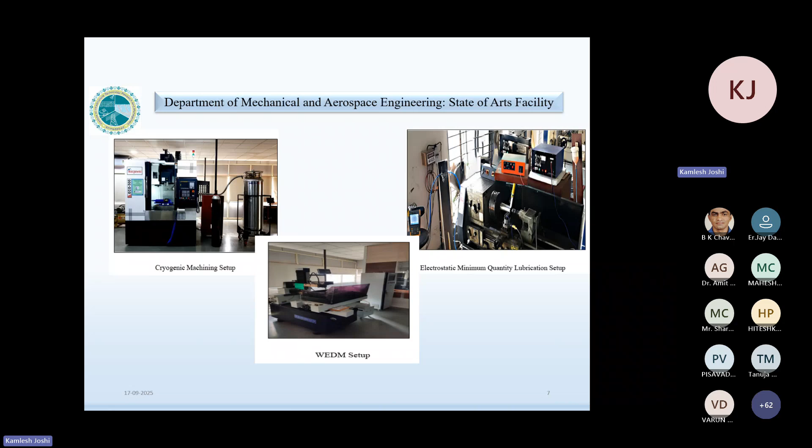Apart from these basic labs, we have some state-of-the-art facilities including the cryogenic machining setup, WEDM setup, electrostatic minimum quantity lubrication setup, air conditioning simulator, wind tunnel, rotational molding setup for making plastic products, photoelastic experiment using polariscope, and a high speed computational facility for simulation with software packages like ANSYS, MATLAB, and Abaqus.

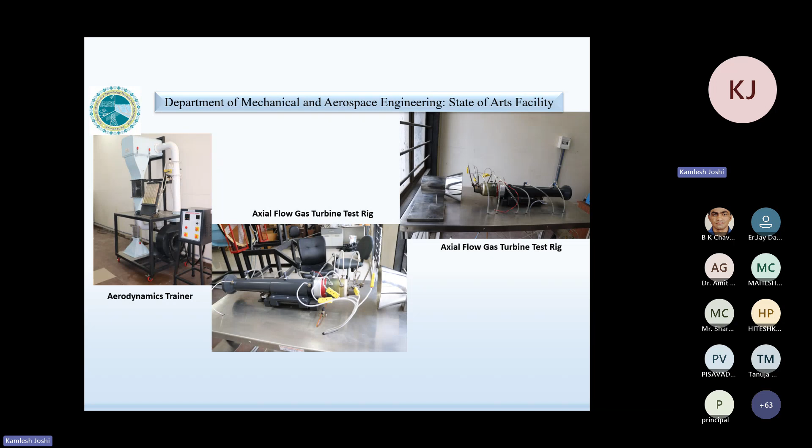In the field of aerospace, we have an aerodynamics trainer and an axial flow gas turbine test rig. All these facilities are open to all researchers - anyone can come and join and work with IITRAM at our institute.

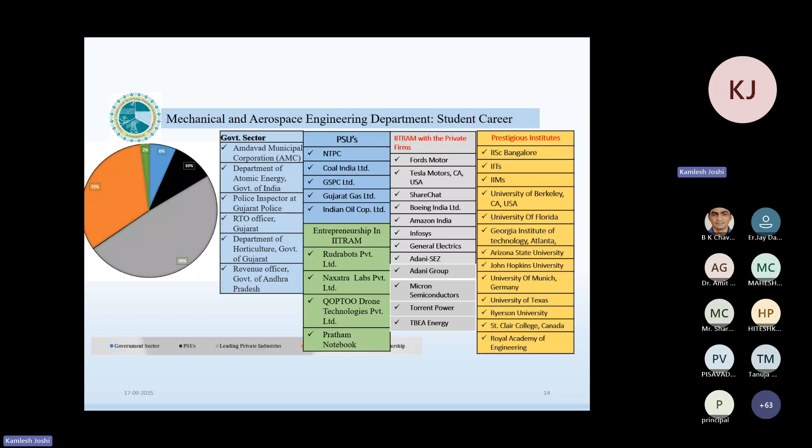These are some of the sectors where our students get placed - government sector, PSUs - and these are some of the universities where our students go for higher studies. So this was a brief introduction to our department.

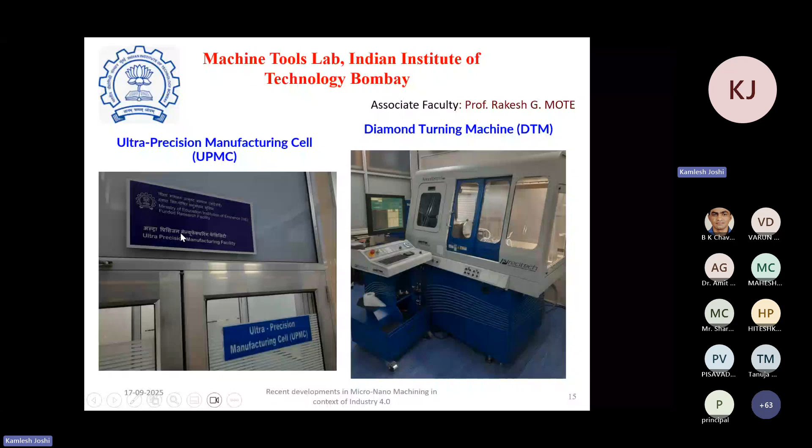Now the work which I will be presenting today is done in collaboration with IIT Bombay. Here it shows the facility of the diamond turning machine at IIT Bombay, and the associated professor is Professor Rakesh Mote. The facility developed is an ultra precision manufacturing facility, funded by the Ministry of Education under the Institute of Eminence program.

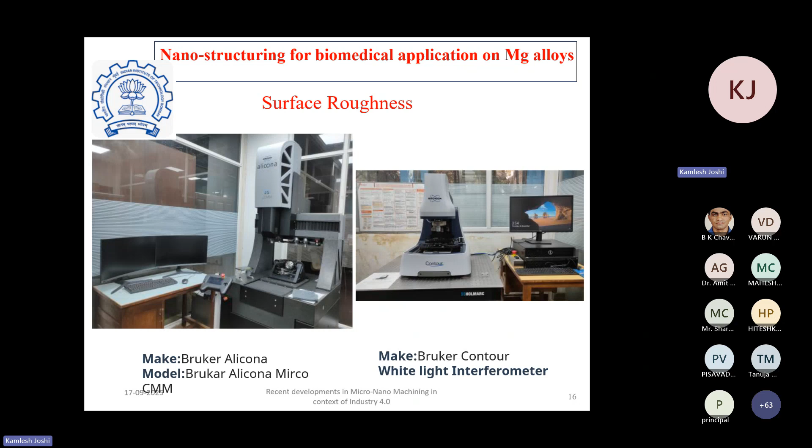Along with this, some of the other facilities we are using include the tool maker's microscope, white light interferometer, Alicona microscope, and an optical tensiometer to measure the contact angle of a drop.

Let's say if we have a surface and we put a drop over it, then the tensiometer can measure the angle of contact made by the solid surface and the liquid surface. If the angle is acute, less than 90°, we can say that the surface is hydrophilic, meaning it is a wetting type of surface, and the liquid will wet the surface.

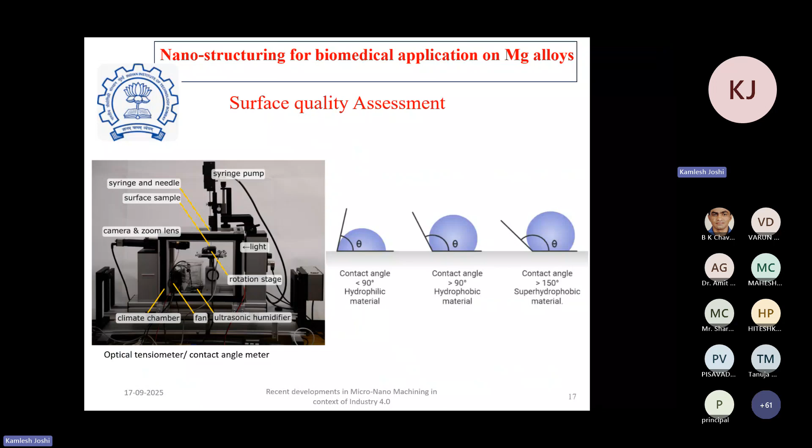If the angle goes beyond 90°, the surface is called a hydrophobic surface, and it becomes slightly non-wetting. If we are further able to increase this angle by more than 150°, then the surfaces are known as super hydrophobic surfaces, and the materials are super hydrophobic materials. So this is what the facilities we have at IIT Bombay.

Now, as per the theme of the program, I first want to give a brief about the different types of manufacturing in terms of domain. We have regular manufacturing here, which is conventional using lathe machine and milling machine - that is known as macro manufacturing. Here the part size or feature size varies from 1 mm to 1 meter.

Then if we are able to reduce the feature size to hundreds of nanometers up to some micrometers range, the manufacturing is known as micro manufacturing. We have a list of machining and manufacturing processes which are classified into macro manufacturing and micro manufacturing.

The processes which link these two, macro manufacturing and micro manufacturing, are termed as meso manufacturing. And the processes which go beyond micro manufacturing, whose feature size goes beyond tens of nanometers up to the angstrom level, come under nano manufacturing processes.

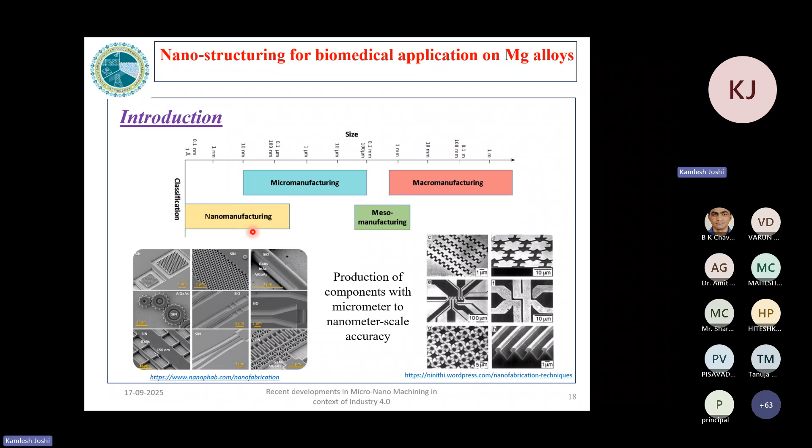Classification wise, the processes which come under conventional machining and have large components are macro machining processes. If we reduce the size to millimeters in terms of depth of cut, miniaturized products and mid-sized structures result, and the process is termed meso machining. Further, if the machining depth of cuts are in the micrometer range - for example micro turning, micro milling, micro electro mechanical systems - then the processes are micro machining processes.

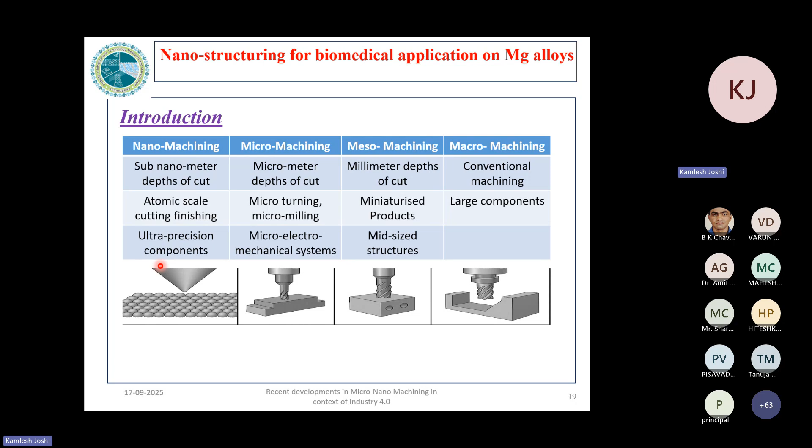And if we further reduce the processes to sub-nanometer depths of cut, machining at the atomic scale - meaning we are machining grain to grain, with the cutting radius of the tool in the range of grain size - then it is a nano machining process, and we can make ultra precision components from nano machining processes.

Processes can be classified in two ways. One is microsystem technologies, which are generally employed to produce micro electromechanical systems, and the other is microengineering technologies, which are processes related to mechanical machining.

In MST processes, where we produce micro electromechanical systems, we have processes like photolithography, electroplating, micro electroforming, and chemical etching, where we don't use either conventional machining forces or unconventional modes of material removal. These processes are classified as microsystem technologies.

When processes use shear deformation to get the shape, we call those processes microengineering technologies. The classification includes micro turning, cutting, micro milling, grinding, and some non-conventional machining processes like laser machining, micro EDM or EDM, and focused ion beam machining. These processes come under mechanical machining processes.

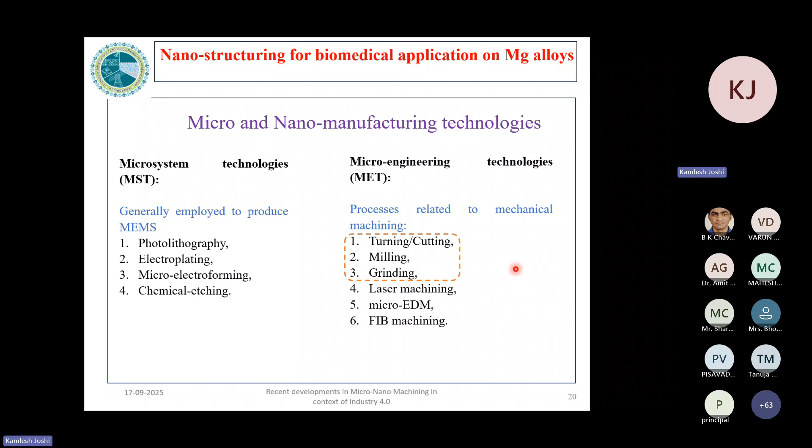We'll see in brief one by one what are the capabilities of these processes and what parts can be made. First, the schematic shows the micro cutting process.

Here we can see a tool whose rake angle is negative, and the chip formation is happening there, and the cutting is happening in this direction. So you can see the tool can be seen as a sharp tool. This is a macro machining process.

But when we cut grain to grain in micro machining or nano machining process, we cannot have such a tool. If you magnify the tool, you can see that it is not sharp as seen in the figure. The tool will have some edge radius, maybe in the range of 0.2 to 0.5 mm. Due to this edge radius, different types of mechanisms come into play - either shear deformation, or extrusion type process, or simply plowing. These phenomena come into picture when we do the micro cutting process.

The depth of cut in conventional macro machining is significantly larger than the radius of the cutting tool. This depth is sufficiently large in conventional macro cutting, and the macro chip formation models are created with the assumption that the cutting tool can completely remove the surface material.

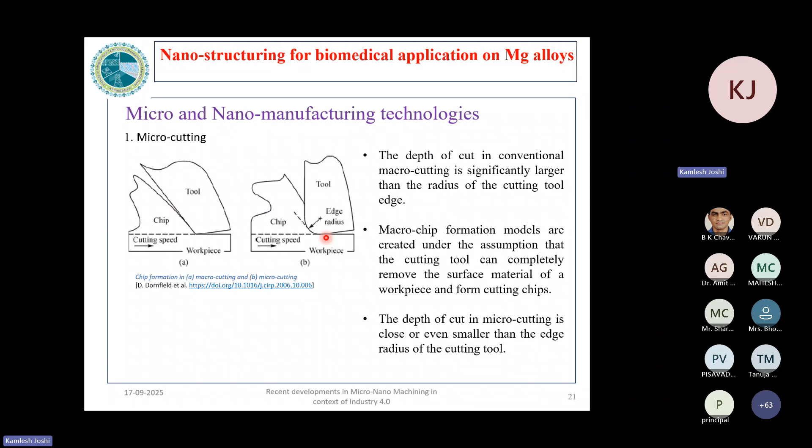But in micro cutting, the depth of cut is close to the radius of the cutting tool. So if we want the depth of cut very small, we can keep it in the range of the edge radius of the tool.

Here some of the features are there which we can see. In micro cutting, we can produce rotational convex shapes with high aspect ratio. This is a needle, and you can see the diameter of the needle is in the range of 5 micrometers, and the surface roughness achieved is in the range of 0.05 to 0.3 micrometers.

Similarly, a plastic molded part is there, where we can see a slot, also in this range, and the surface finish is less than 10 micrometer... nanometer. This is from micro milling.

The references are given. Holes drilling can be done using the micro drilling process. The size of the hole is again in the range of 5 micrometers, and we can make some convex and concave shapes of hard brittle material.

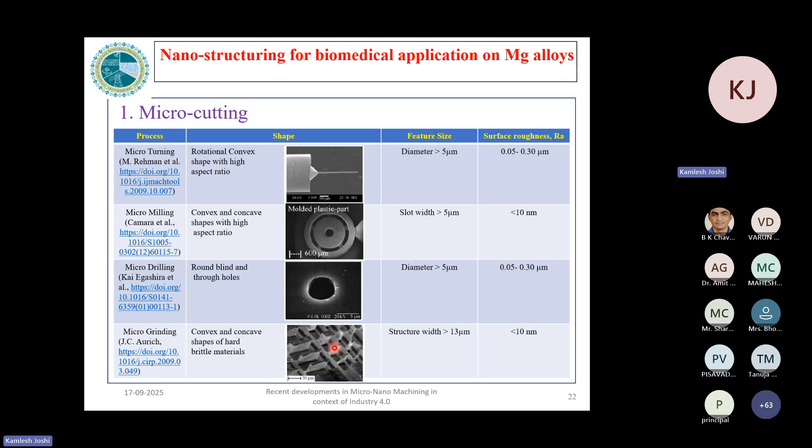You can see the structure width is in the range of 13 micrometers, and the surface roughness is in the 10 nanometer range.

Micro EDM is again one of the advancements in the conventional EDM process, where we can get the wall thickness of the material in the micrometers and nanometers range.

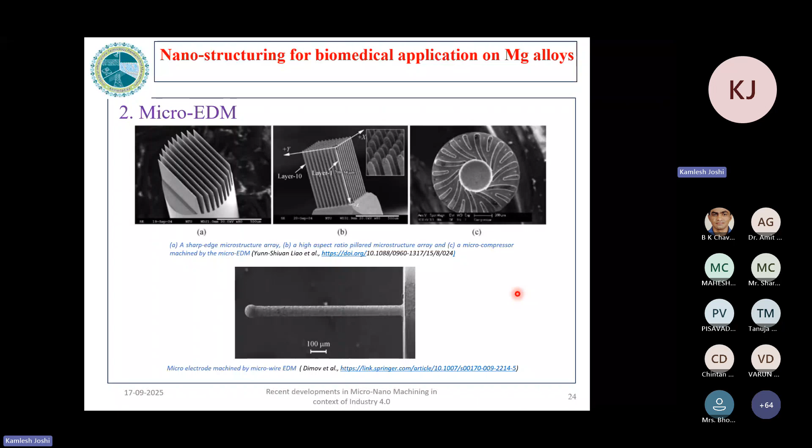You can see some of the examples. A sharp edge microstructure array is there. A high aspect ratio pillars array is shown here, and a micro compressor machined by EDM process is shown. Similarly, a micro electrode machined by micro wire EDM is shown here. So these are some of the difficult to achieve shapes which we can achieve from the machining process.

Another process is laser micro machining. The laser is having a vast capability on its own, and it can produce various difficult to achieve shapes, like these through holes arrays, and you can see we can achieve the arrays required through laser machining. This is the honeycomb type of microstructure which we can make, and this is a micro spinneret in the size of hundreds of micrometers, and these are some of the cone like protrusions fabricated by laser micro machining.

Laser micro machining can be done in two ways. One is the percussion type of laser drilling, where the laser beam is focused on one area, and then it keeps on removing the material throughout the depth. You can see high depth can be achieved. The problem here is that we get a diameter which is tapered from top to bottom.

Another way is the trepanning type of process, where we rotate the beam from corners to edge and remove the material. The hole diameters achieved are relatively more compared with the percussion method, but here the tapering is not an issue. So if we want to have a uniform type of hole with uniform diameter, we can use this type of process.

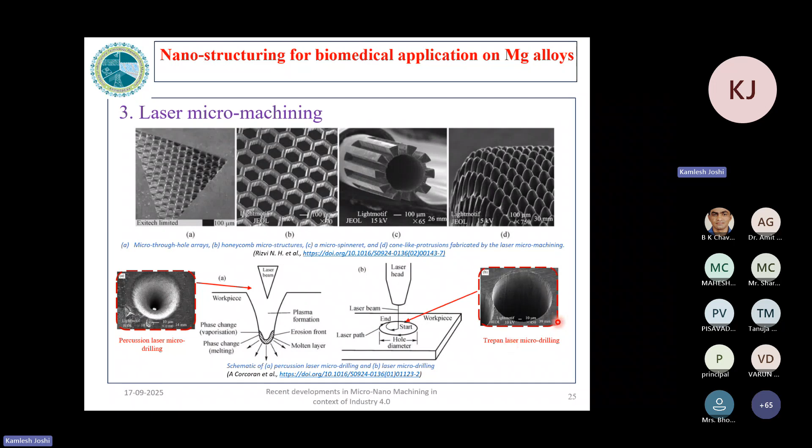And the last process which I want to discuss is the focused ion beam type of process. Here we have ions of high energy focused on the substrate, and these higher energy ions bombard the substrate, which causes localized heating. It removes the material in sputtering form and creates the hole by removing the material. You can see some of the specimen here.

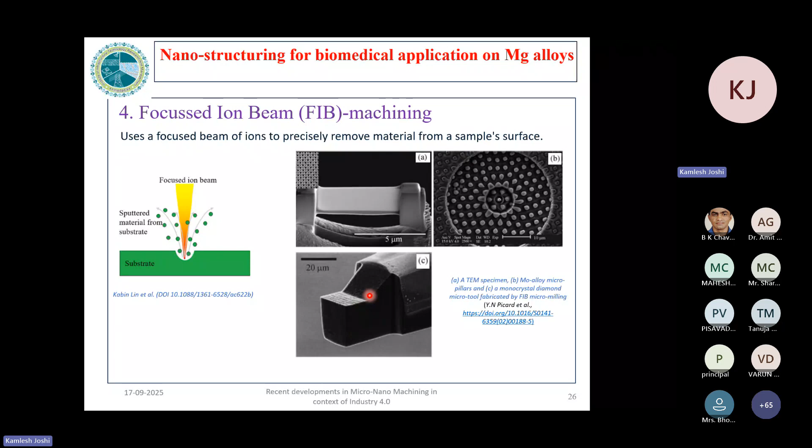One of the uses of this FIB process is to prepare transmission electron microscopy samples. In this example, you can see molybdenum alloy micropillars are made, and a monocrystal diamond micro tool is fabricated using focused ion beam micro milling. So these tools can then be used in the diamond turning process to create the required features.

Now coming to the theme of the topic, that we want to produce the micro features on the magnesium alloys. So before going to the magnesium alloys, we will see what are the orthopedic and dental implants.

As we already know, orthopedic implants are the metallic or alloy parts which are inserted into the body of the patient to get the desired strength of a particular part. The common materials used are stainless steel and titanium.

So what happens is in some cases, after the part is put in and healing occurs, tissue growth happens in the part, and we have to remove the implanted part using a secondary surgery, such as if we are putting some screws, plates or rods in the bones, and after some time if our bones get healed, we have to remove those parts using a secondary surgery.

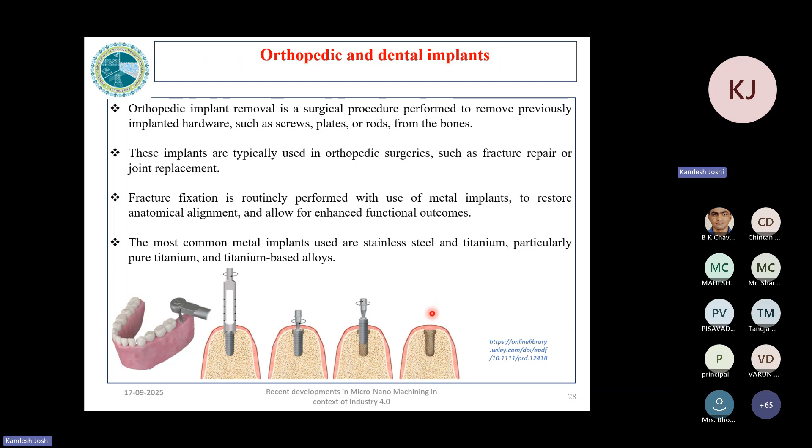You can see here an orthodontic implant example is shown. First drilling is done, and then we are putting some screws inside the gums, and once the screw has been inserted, it'll develop the tissues and strength around the system, and then the screw will be removed, and the required tooth will be inserted in this place. So this is one of the examples.

People have used or tried magnesium based biodegradable temporary implants in the body. So why are we choosing magnesium over already successful materials like titanium and stainless steel? Because they have emerged as a promising alternative to traditional metallic implants due to their biocompatibility, biodegradability, and acceptable mechanical properties.

So they have this property that once they are inserted inside a patient's body and the body heals, we are not required to perform a secondary surgery. They get absorbed in the body, and hence they reduce the need of removal due to secondary surgery.

And as we are not doing the secondary surgery, the potential for long-term complications has been avoided. So these types of implants are used in orthopedics, dentistry, cardiology, and some other medical fields. Some of the examples are shown here. These are the orthopedic devices which are made from magnesium alloys. This is one of the tightening screws, as we have seen in the previous slide.

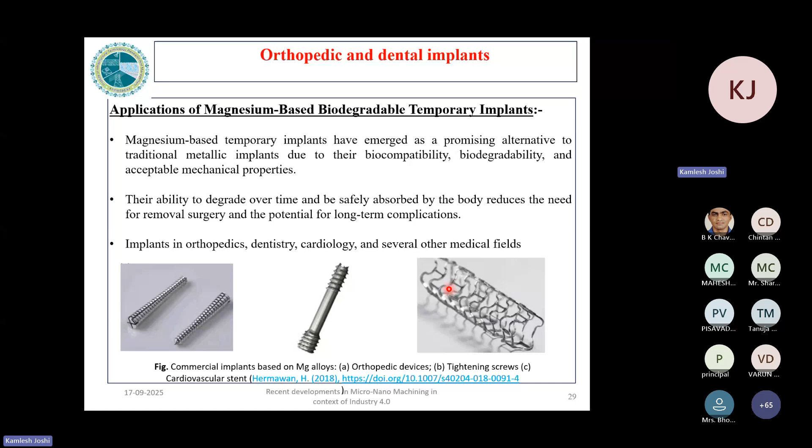And a cardiovascular stent is shown here in this picture, which is used to expand the blood arteries. If there are some blockages there, the doctor will insert this type of stent in the body, and then they will expand the artery and help the flow of blood inside the body. Similarly, you can see there are various types of stents made from magnesium alloys and various other orthopedic implants made using magnesium alloys.

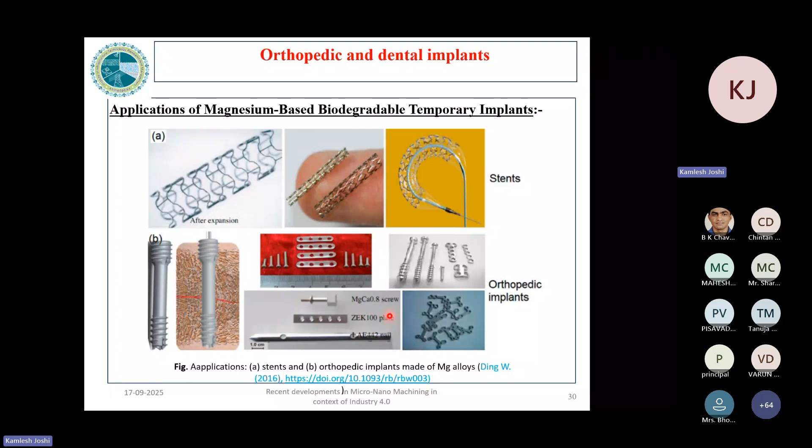So magnesium alloys are a very good choice for implants. So what are the main properties due to which they have become a competitive material for titanium and stainless steel? So first, their mechanical properties are similar to the bone material. And these properties can be tailored using alloying elements like aluminum and zinc. These alloying elements will enhance the strength and reduce corrosion-forming impurities like iron and nickel.

The second advantage of magnesium and its alloys is that they have very good biocompatibility with the body. So magnesium has similar mechanical properties as human bones. However, gradually they are absorbed by the body, and magnesium is one of the required ions or minerals in the body. So if it gets dissolved in the body or mixed with the bloodstream, it does not harm the body. Therefore, if it gets absorbed in the body, it eliminates the need for secondary surgery, which is generally used with titanium implants.

Third, it has very good biodegradation. Biodegradation refers to the process by which a material breaks down over time in the physiological environment. A physiological environment, like the blood in our body, and the material gets metabolized or excreted in the body.

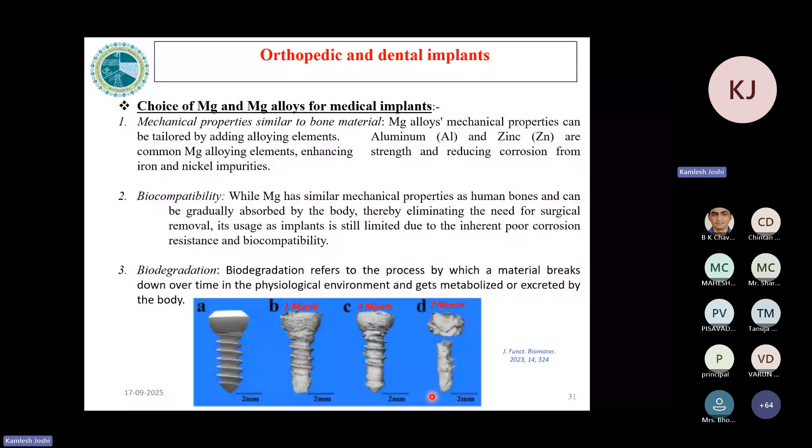Okay, so here is an example where a screw can be seen. If we put this screw in a physiological environment, after 1 month it will show degradation, which can be seen in this picture. Further, after 4 months, the screw got degraded in this manner, and after 7 months, the screw got degraded completely at this point.

Fourth and foremost, the most important thing is osseointegration. Osseointegration is the bioactivity, meaning it helps grow tissue and promotes the growth of tissue over the implant. It creates an apatite layer composed of inorganic compounds like calcium and phosphates. So let's say we have a magnesium material in contact with our bloodstream or other physiological environment. Due to the reaction with this media, it will generate magnesium ions.

When these magnesium ions are generated, they interact with the body media and make the magnesium hydroxide component. Further, this magnesium hydroxide combines with the calcium ions and phosphate ions in the blood and makes a layer known as the apatite layer. This apatite layer, which can be seen here in brown color, covers our implant, and tissue growth can happen over it.

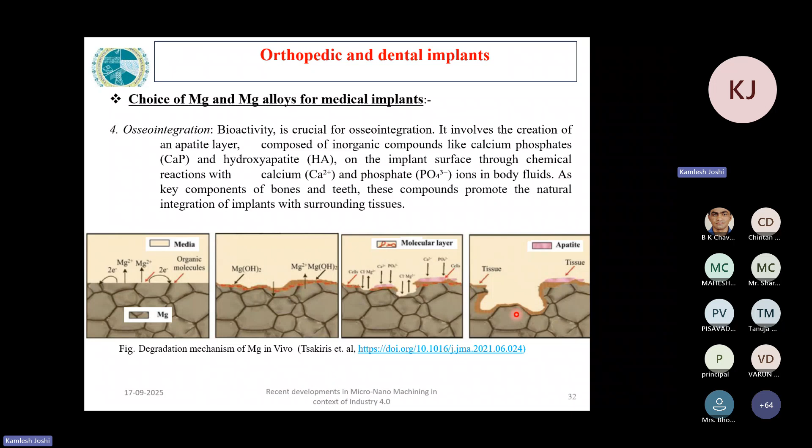So this is a type of passive layer which stops further degradation of the magnesium alloy implant, and it helps in the production of tissue over the material.

Okay, so here is a summary of why we have chosen magnesium and magnesium alloys for medical implants. First, they have natural biodegradation capacity due to their susceptibility to corrosion in aqueous solutions, especially those containing chloride ions, as compared to iron and its alloys. Magnesium has excellent biocompatibility, and its ions released in the bloodstream are used in natural metabolism and do not have any toxic or side effects on the body.

Its mechanical properties, like modulus of elasticity, match the natural bone modulus of elasticity, as compared with other materials like stainless steel, cobalt-based and titanium-based materials. For these three materials, you can see the modulus of elasticity is very high. However, magnesium has a comparable range with the bone material.

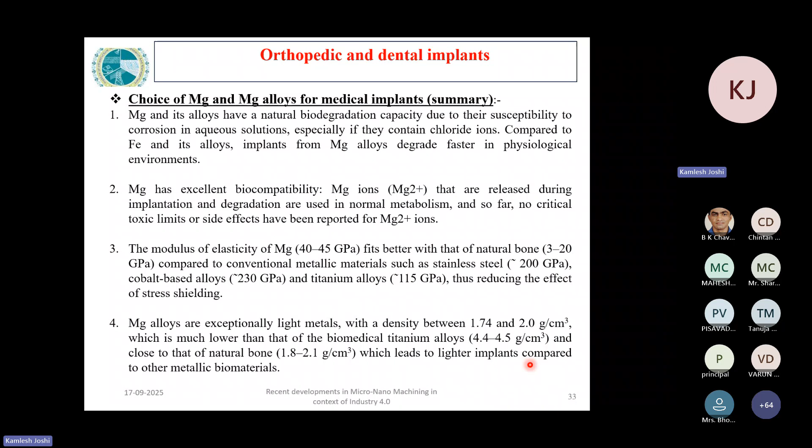They are also exceptionally light materials. The density lies around 1 to 2 grams per cubic centimeter, which is much lower than titanium alloys, around 3 to 4 times that of magnesium alloy. And this density is closer to natural bone, which leads to lighter implants compared to other metallic biomaterials.

So here we have seen the three steps of biodegradation. First, surface oxidation happens. Magnesium-based implants, when exposed to the biological environment, develop a thin oxide layer, as seen in the previous slide.

And these oxide layers tend to serve as a protective layer and prevent further corrosion and degradation of the magnesium implant. In the second stage, the corrosion starts. The magnesium implants start to corrode actively in the biological medium by the electrochemical reaction. So the anodic and cathodic reactions are shown here.

Magnesium first disintegrates in the form of magnesium ions and electrons. When these magnesium ions and electrons interact with water molecules, at the cathode, hydrogen gas evolution takes place, and the product is magnesium hydroxide, which is a biocompatible type of material.

In the third stage, dissolution takes place, where the magnesium implant is gradually dissolved in the body fluids, and the released magnesium ions are transported away in the body fluids, and then they are excreted through our urinary system.

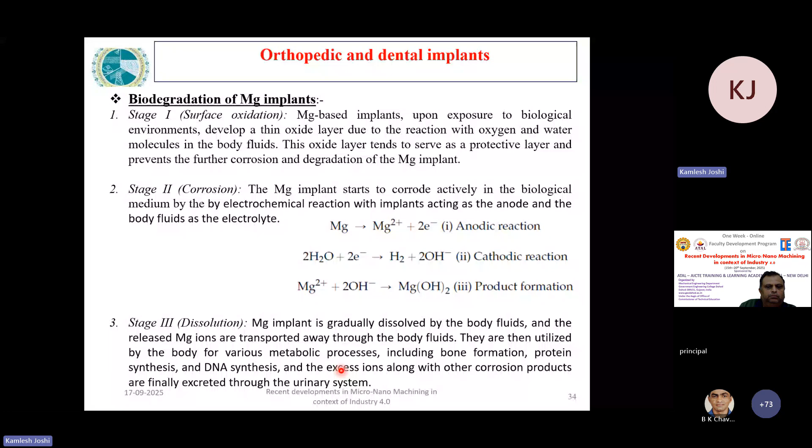So apart from these advantages, there are some issues in the use of magnesium as a bioabsorbable material. First, its rapid corrosion and degradation is one of the issues, which causes the formation of magnesium oxides quickly in the body. This rapid degradation can lead to premature loss of mechanical integrity before the tissue has been fully healed.

Another problem is the hydrogen gas evolution during corrosion, which causes gas pockets, tissue necrosis, and delayed healing. So this hydrogen gas evolution is another problem, and it has low strength and fatigue resistance, which can be problematic for load bearing applications. If the application is of static type of loading, then there is no problem. But if the application is of dynamic nature, then due to its lower fatigue resistance, it may cause some problems.

So these problems can be overcome in various ways. One of the ways is to add alloying elements to the magnesium. So the addition of alloying elements such as aluminum, manganese, zinc, zirconium, calcium, and other rare earth elements enhances the corrosion resistance of magnesium based implants and effectively controls the biodegradation.

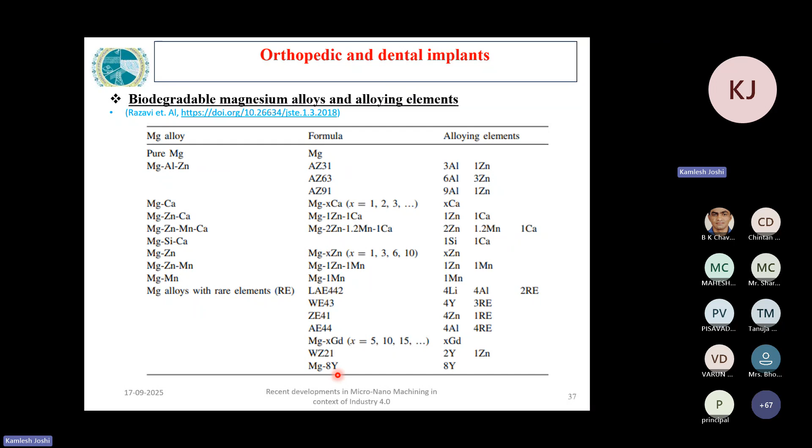Here a list has been shown which shows various types of magnesium alloys which can be used as bio implant material. First is pure magnesium. However, the dissolution rate in pure magnesium is very high. Other ones are AZ31B, AZ63B, AZ91B, and they vary in the aluminum composition inside them. Apart from this, there are several other materials which are yet to be explored for biomedical application.

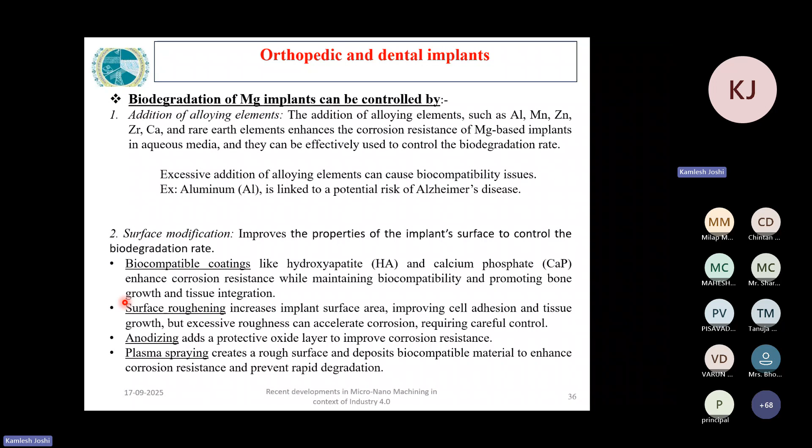Now in this work, what we are focusing on is to change the surface of the material to improve the roughness parameters of the material and improve the hydrophobicity of the material. In order to do so, we can use several methods. Laser machining is one of the ways which people have already tried. We have this facility of the diamond turning process, which has the ability to produce micro features or nano level features on the surface, and those nano level features can affect the corrosion behavior of the material.

So first we'll see what this diamond turning process is. So the diamond turning process is similar to our conventional lathe machining process. The only thing is that the tool size is very controlled, and it is an ultra precision machining process which is used for achieving a surface roughness in the range of nanometers on various difficult to machine materials without affecting the accuracy of the components. The famous material used in the diamond turning process is aluminum. Brittle materials like silicon carbide are also usually investigated with this diamond turning process.

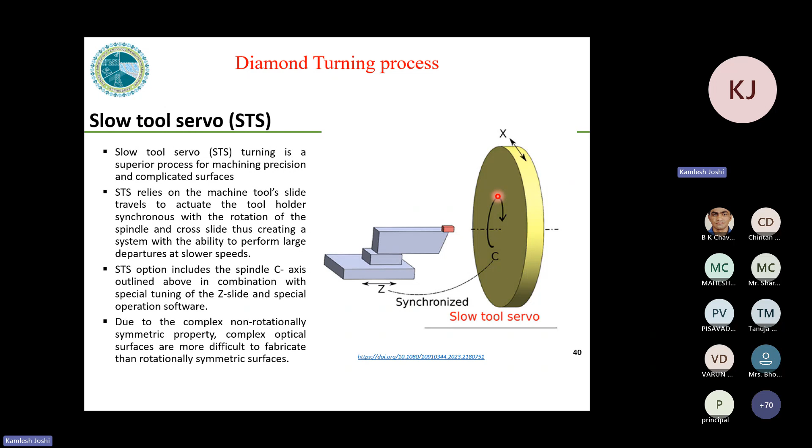First, what is a slow tool servo process? In this, the tool post is vibrated parallel to the z-axis. So slow tool servo turning is a process for machining precision and complicated surfaces. It relies on the tool slide and includes the spindle c-axis motion, and the motion of this vibration is synchronized with this c motion. We can have a video to see the slow tool servo process.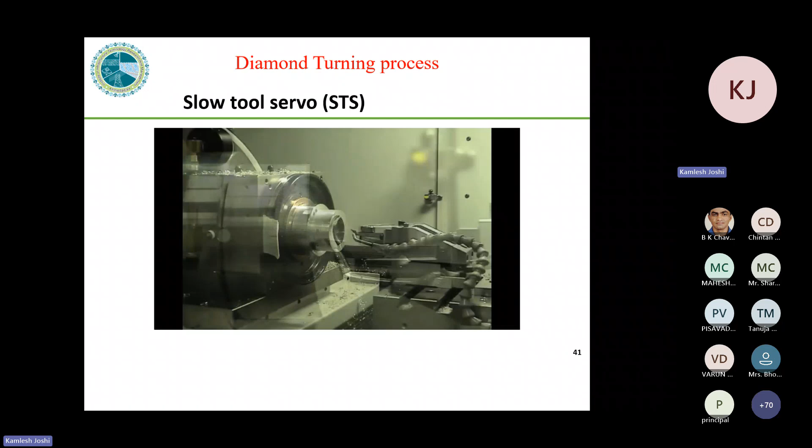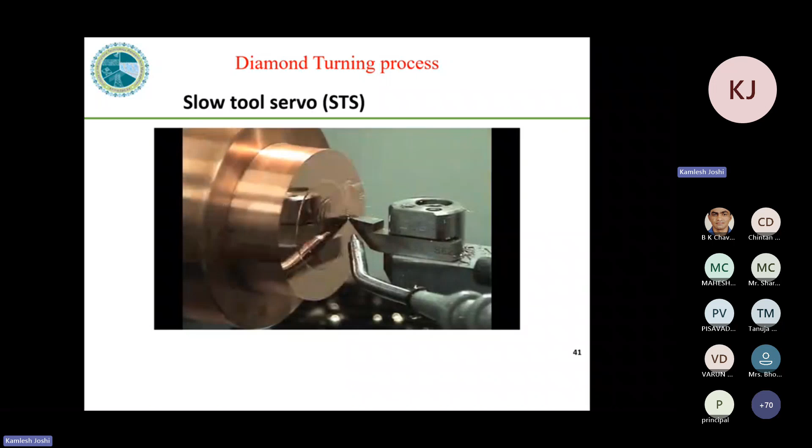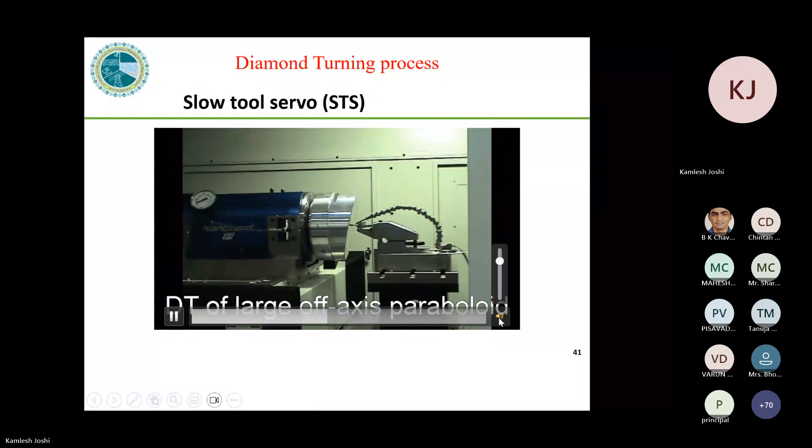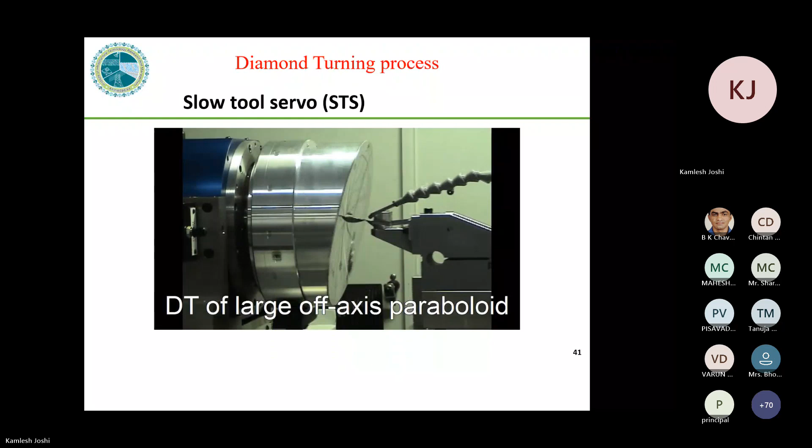So a diamond turning of a 10 millimeter tilted flat is shown here in the demo. You can see the amplitude of vibrations are slow and they are synchronized with the C motion of the workpiece. A toric form is machined in this example. A large off-axis paraboloid is being machined here in this example. Diamond turning of large off-axis paraboloid.

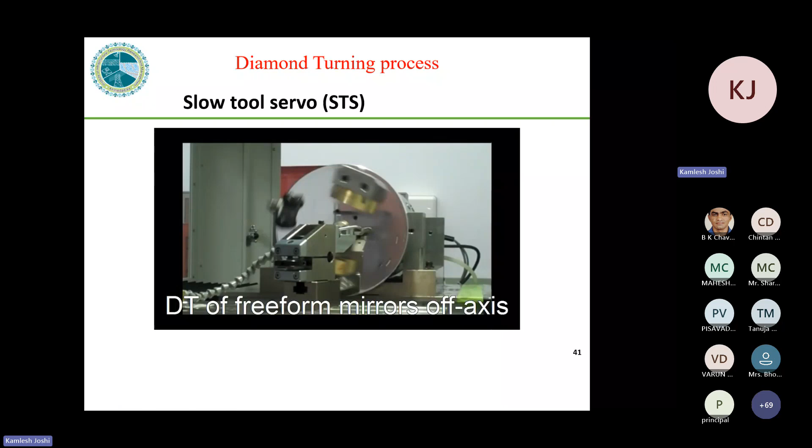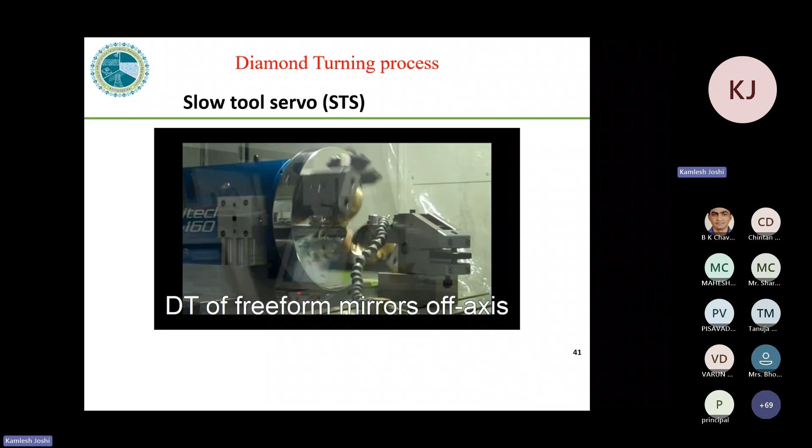Another view to form the free-form mirrors. So its applications lie in making the lenses. The lenses are made using these processes. So these were some of the examples of the slow tool servo process.

Now the fast tool servo process, again the same thing. However, the vibrations which are given to the z-axis are of higher frequency as compared to the slow tool servo process, and this fast tool servo process can be used for the turning of functional surfaces which have more complicated structures. So here we have a video which shows the fast tool servo process, from Precitech.

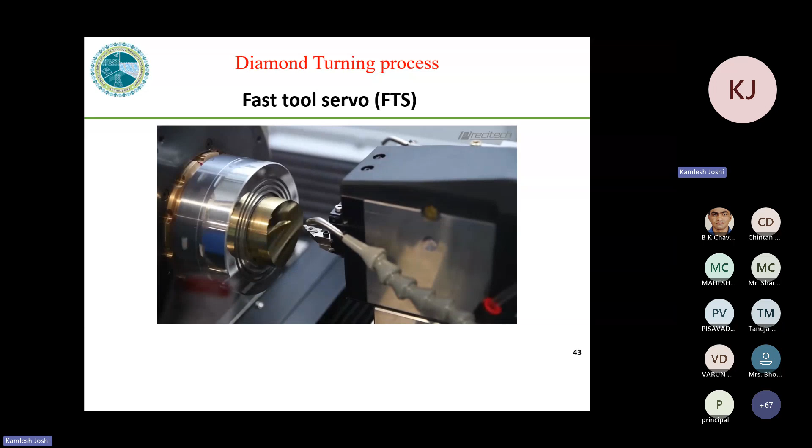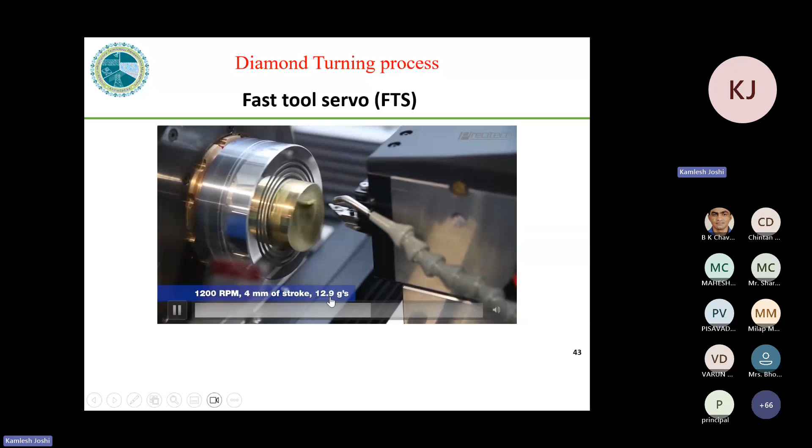So here the RPM is currently low, 100 RPM, and a stroke of 4 mm with an acceleration of 0.1 g has been applied. Further, the RPM has been increased to 1200 RPM. Along with RPM, the acceleration has been increased to 12.9 g. A slow motion video shows the machining of the fast tool servo process at 10,000 frames per second.

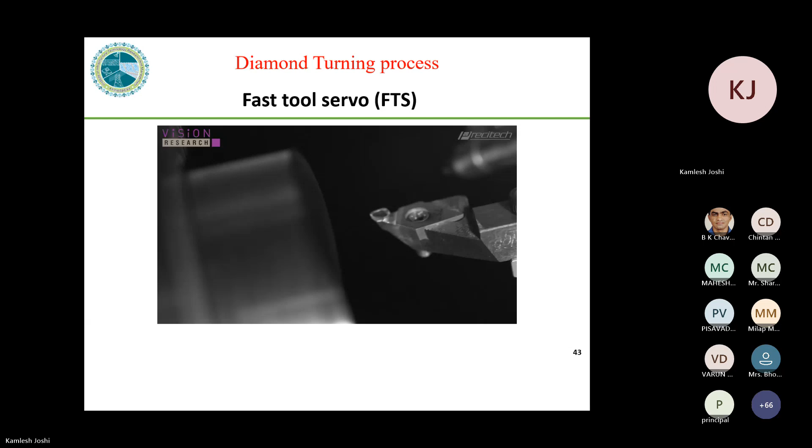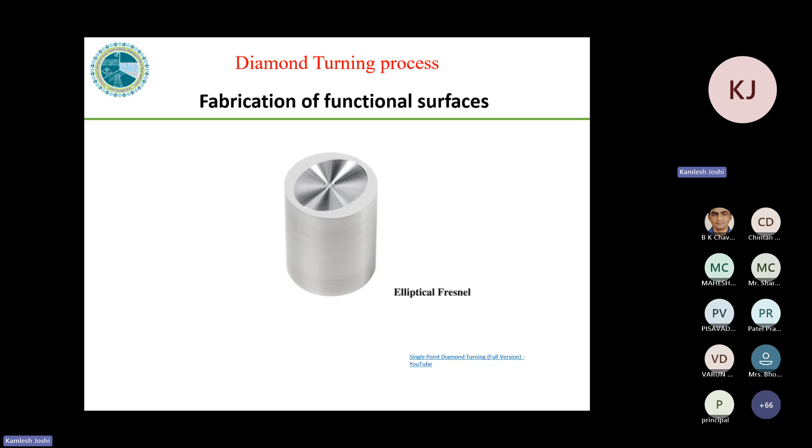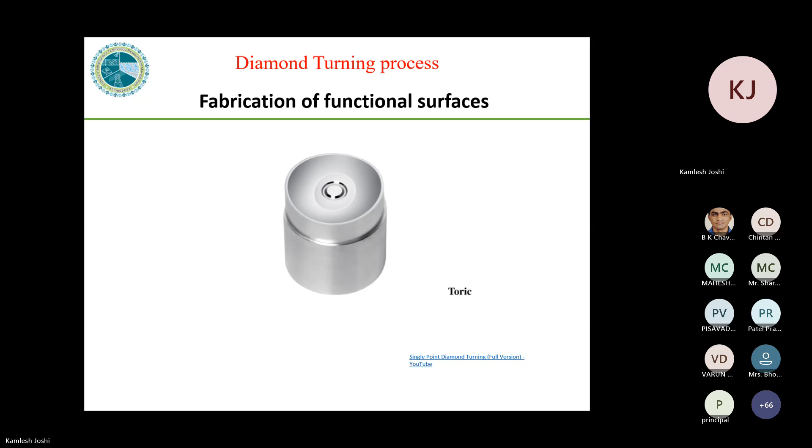What are the various applications which we can have? We can fabricate various types of functional surfaces using the single point diamond tool machining process. Some of the surfaces are shown in this video. This is an elliptical Fresnel mirror. Now we are fabricating one toric surface. This is a toric surface here.

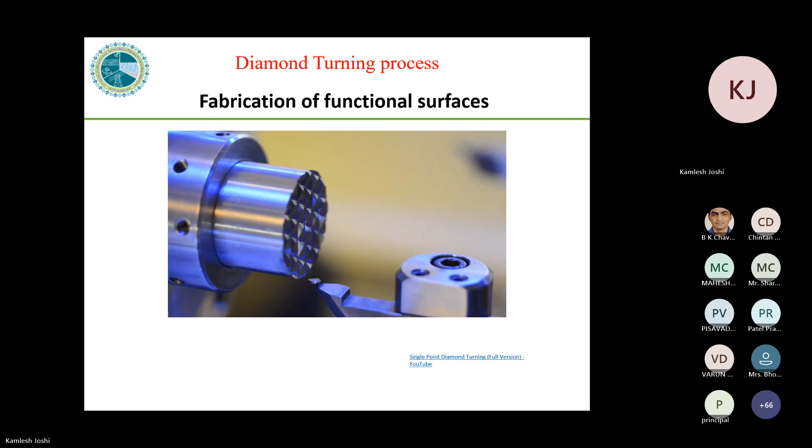And if we have the X and Y axis both available in the system, we can make this type of asymmetrical surfaces with various contours. So here a lens array has been fabricated on a square shaped surface. Various pyramids are formed on the surface.

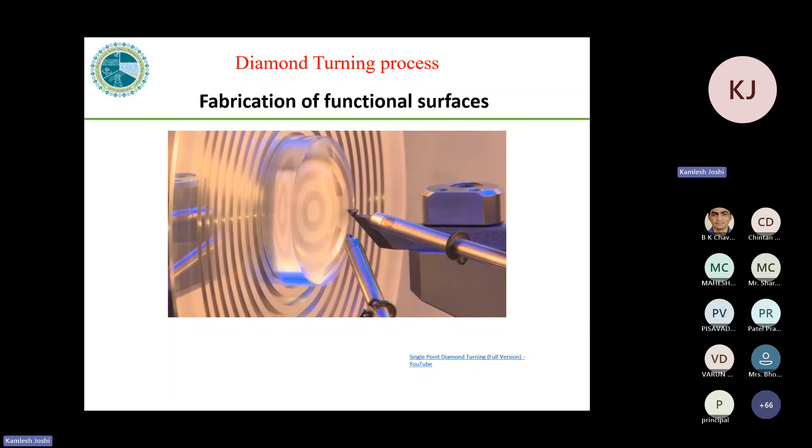Here the aluminum has been machined to form a convex type of surface. We can do the machining on plastic also. So these are some of the examples of the capability of the machine.

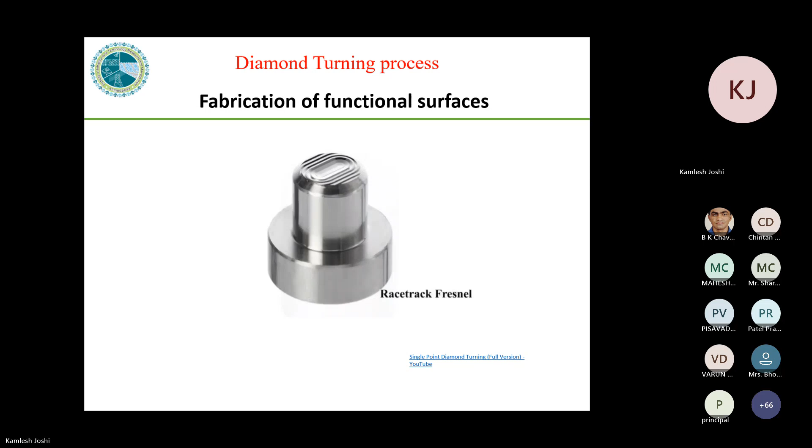Okay. So in the last few slides, we have seen some of the capabilities of the machine. The machine has very vast capabilities, and it has a wide range of applications in the field of optics, in the field of semiconductors. Here, our challenge is to produce the nanostructures on the magnesium alloys using diamond turning machining.

However, there are some big challenges in the machining of magnesium alloys. First challenge, as we all know, magnesium catches fire easily. So it is a highly flammable material. So people generally do not operate magnesium materials on DTM machines. So chip ignition and fire hazard is one of the issues here.

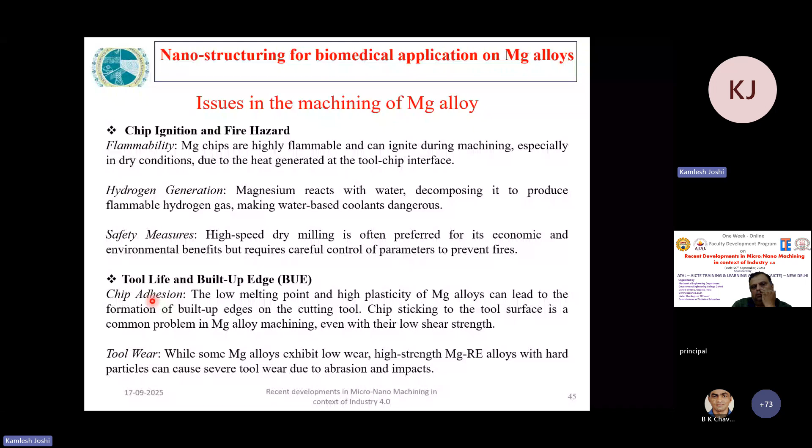So flammability: magnesium chips are highly flammable and can ignite during machining, especially in dry conditions. Hydrogen generation happens. Safety measures are some of the issues in high speed machining. Tool life and built-up edge formation happen because magnesium is a highly ductile material, and the chips which are formed adhere on the tool material, which further deteriorates the surface of the machine, and tool wear is also one of the issues.

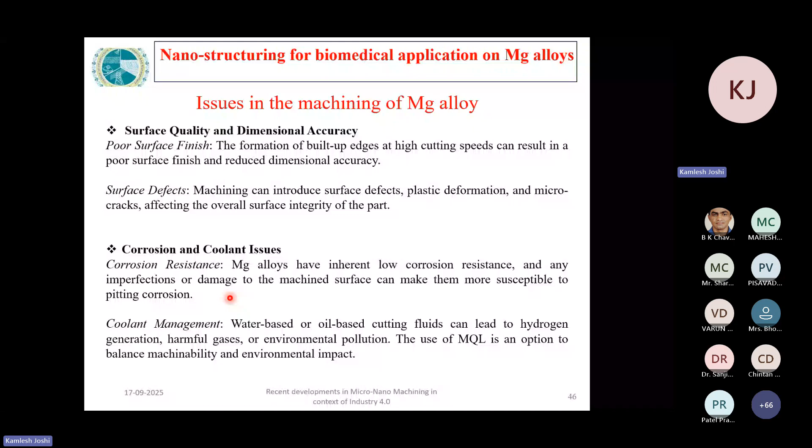Surface quality is very poor in machining of magnesium. If we use any machine in conventional machining methods or micro machining methods, we will get very poor surface quality. Surface defects will be there. Corrosion and coolant issues will be there. So magnesium alloys have inherently low corrosion resistance, and any imperfection or damage to the machined surface can make them more susceptible to pitting corrosion. So these are some of the challenges in the machining of magnesium.

Another challenge is to select a proper tool and its geometry. So the tool and geometry can be understood in terms of one parameter, which is relative tool sharpness. So relative tool sharpness is the ratio of uncut chip thickness. Those who are from the mechanical background can understand what is uncut chip thickness. So this is the uncut chip thickness. And if this is the tool, then we can say this R is the tool radius. So if we take the ratio of A divided by R, it gives the relative tool sharpness.

So if the uncut chip thickness or feeds are in the range of the tool edge radius, our relative tool sharpness will become unity. And here during the cutting process we will get cutting due to the shearing process. If we decrease the relative tool sharpness, the process of cutting changes from shearing to extrusion. So what will happen when it is changing from shearing to extrusion? The shear angle or the angle of repose changes. Here you can see the angle of repose is positive. It changes at around 0.4 to negative, and the process changes from shear to extrusion, which deteriorates the surface quality.

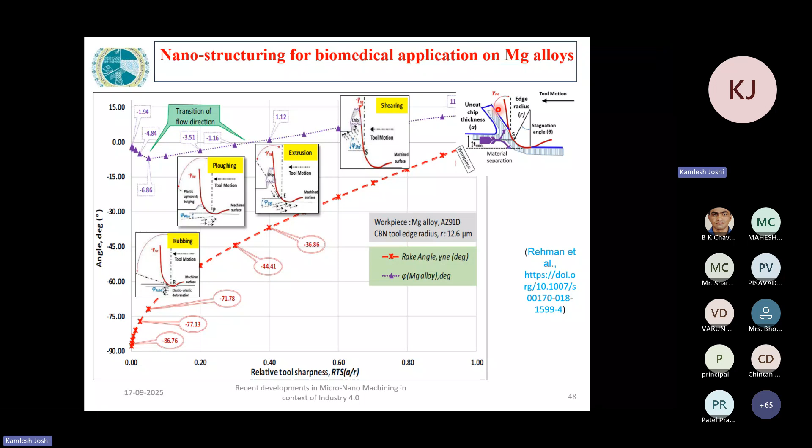So in order to get the desired uncut chip thickness level and maintain the relative tool sharpness ratio, we have to select the tool edge radius based on the calculation as shown by Professor Rehman and his team in this diagram. So we have done some literature review and found that for machining of AZ31B magnesium alloy, people have used a tool radius of 0.509 mm for pre-machining, 0.5 for texturing, and 0.2 for sawtooth type of profile formation. These are the manufacturers of the tool.

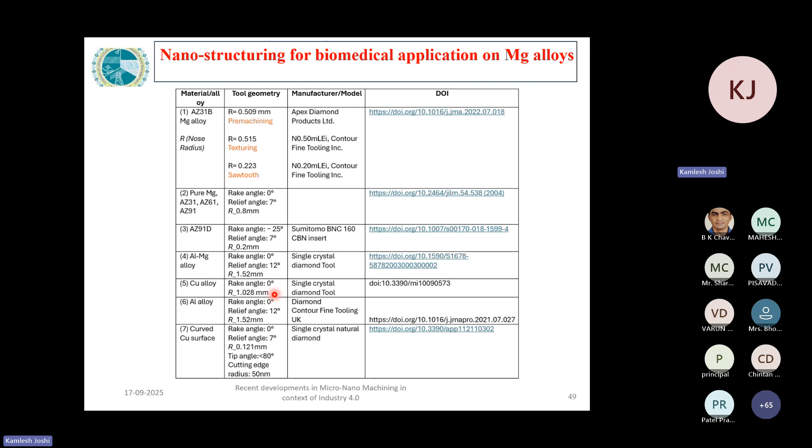Here in another paper, people have used machining of magnesium AZ31, AZ61 and AZ91. They used a radius of 0.8 mm and a rake angle of 0 degrees. In another one, Sumitomo cubic boron nitride inserts were used, and these are some of the angles. You can refer to the slide to find the range of tools which can be used for machining of magnesium alloys.

Here we have shown one of the tools. Here you can see the diamond insert, and the top view is shown here. This is our tool holder, and a machining video of AZ31B magnesium alloy using this diamond insert is shown here. So we have tried various types of tools. We have tried polycrystalline tools. We have tried cubic boron nitride tools. Because of course natural diamond tools are very costly to fabricate and very costly to use. So there are alternate tools which can be used for the process.

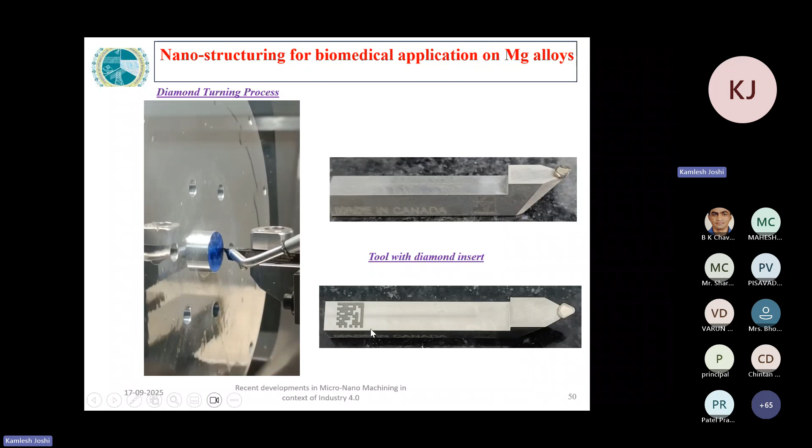Now I am showing some of the experimental details. After a lot of trial-and-error pilot experiments, we reached these experiments. So we kept the RPM of the C axis around 1000. We changed the feed to 2 mm, 4 mm and 6 mm per minute. The depth of cut was 6 micrometers. The tool material used was polycrystalline diamond. The shape was a 55-degree diamond shape. Nose radius was 0.4 mm, 0 rake angle and 7-degree clearance angle. You can see here we have the magnesium AZ31B workpiece material.

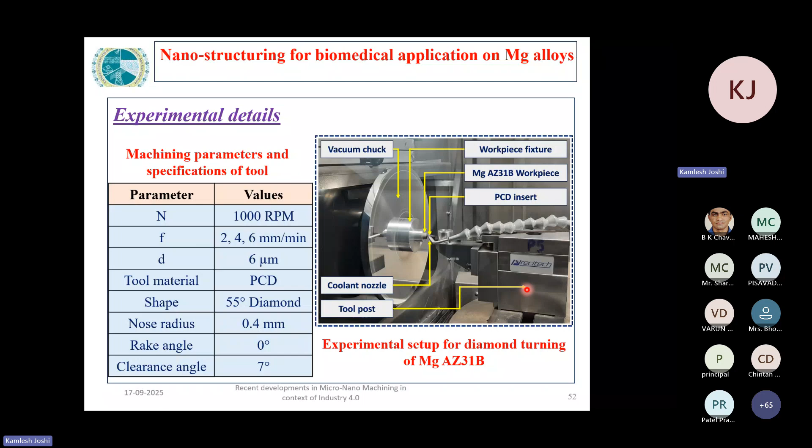This is the vacuum chuck here. The PCD insert is here. Coolant has been flown through this nozzle and the tool post is shown. The machine is from Precitech engineers. And then we measured the surface roughness and the optical profile through the white light interferometers.

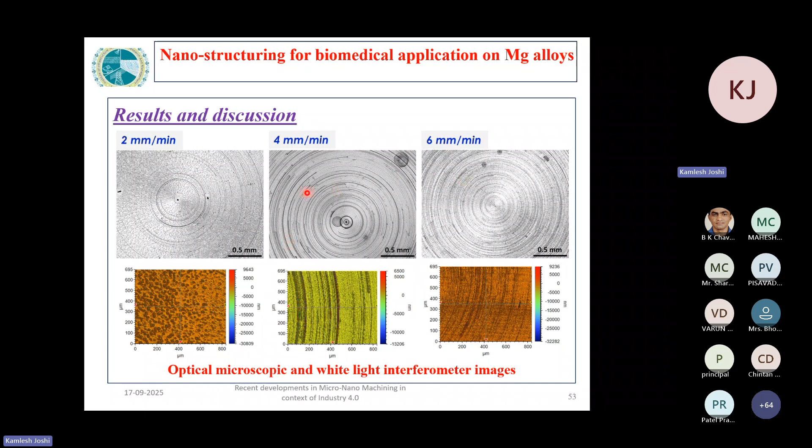You can see the surface machined at 2 mm per minute, 4 mm per minute, 6 mm per minute. As we increase the feed rate, you can see the marks, rubbing marks or cutting marks are more visible on the surface. When the feed was kept at 2 mm per minute, the shallow grooves were observed on the surface along with the scratches and pits, and effect of material inclusions were also observed.

After increasing the feed rate to 4 mm per minute, the frequent scratches on the surfaces were seen, shallow grooves were evident, and mirror surface was achieved. And further increasing the feed rate, deep grooves on the outer surface were observed, scratches were observed, and the mirror surface was converted into a clouded type of surface.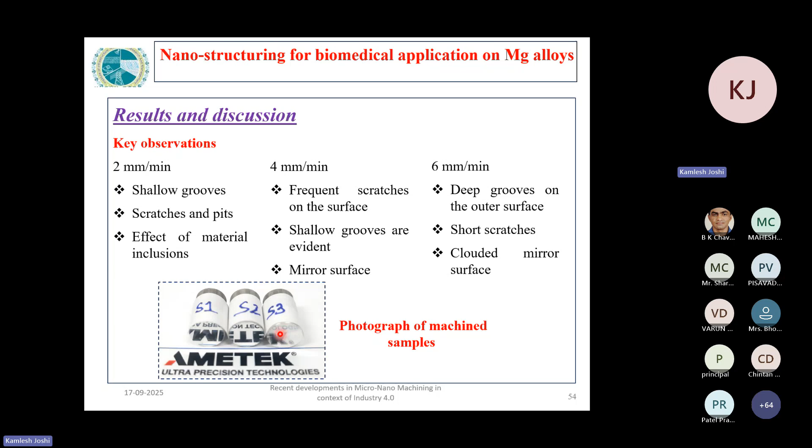So this is one of the photographs of the machined samples. If you see directly, it looks like a mirror polished surface, but at the micro level, it gives us the things which are happening in the material. So at 6 mm per minute, you can see the surface got some clouded type of thing.

So the surface roughness was measured, and it was found that the highest surface roughness was with the lowest feed rate, and with an increase in feed rate, the surface roughness was improved, and a sharp decrement in the surface roughness values as the feed rate increases from 2 to 4 mm is observed, and this can be related to the absence of pits and voids observed at the lower feed rates.

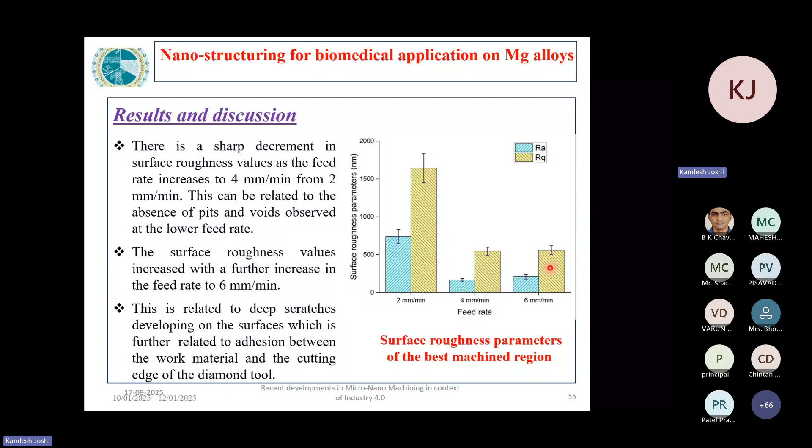The surface roughness values increase further when we increase from 4 mm per minute to 6 mm per minute. And again, this is related to the deep scratches developed on the surfaces due to the adhesion between the workpiece material and the cutting tool.

Constant spindle speed is used, which suggests that the cutting speed is not constant. So if you come from outside to the center, the linear velocity of cutting changes. So this is shown by measuring the surface roughness near center, middle of the surface, and extreme end of the surface. So the lowest value of the surface roughness was near the center when the feed rate is 4 mm per minute, which indicates that the surface generation mechanism is dependent on the combination of both feed and the cutting speed.

The lowest value of Ra was obtained to be 164 nanometers, which is still not good as per the capability of the diamond turning process, but this is the best which can be achieved on the magnesium alloy surface. Now, after getting the best parameters, we try to fabricate the micro lens arrays on the workpiece surface to get super hydrophobicity on the surface.

So this is the methodology of the work. First we have programmed the machining process to produce the 3D lenslet surfaces. The surface setup was done. Design and surface options were created. Parameters were set from the previous study, and then the spacing and radius of the pits were set. So you can see these are the micro lenses. We created the convex lens as well as the concave lens.

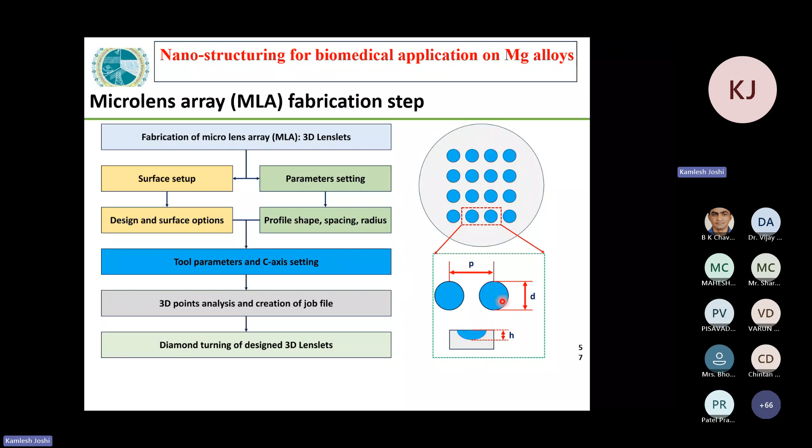We used the dry machining condition as well as the lubrication condition, and we varied the pitch between the two lenses as well as the diameter of the lenses, and this h is the depth at which the lenses are created. These are the optical images of the machined surface.

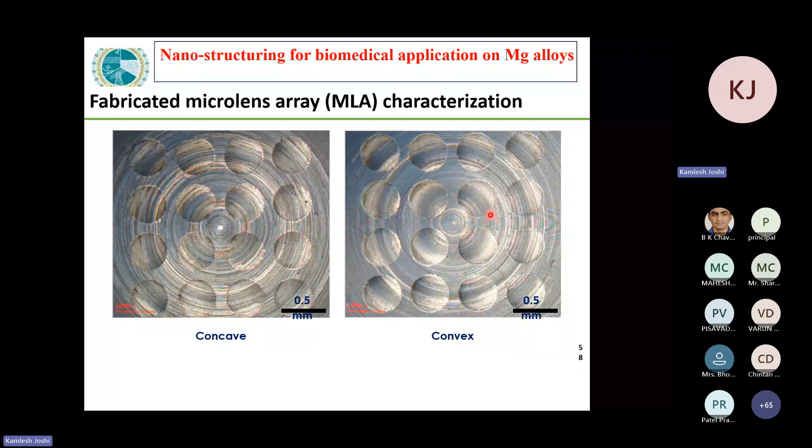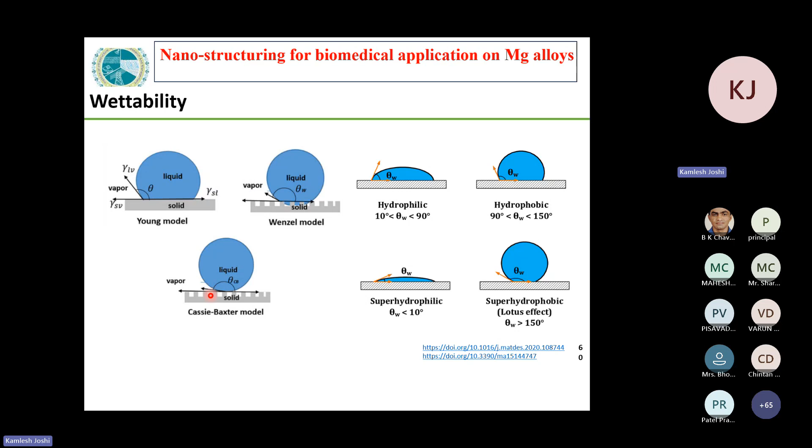We have in general the Young's model where the contact happens between a solid and a liquid surface, and the energy is used to find the nature of contact happening there. If we create some surfaces like this, it can have a Wenzel type of model where the liquid penetrates inside the material, or it can have the Cassie-Baxter type of model where it does not penetrate inside the surface. So air pockets get inside the hollow surface, and the liquid droplets lie over the surface.

So these are some of the results which we got, for the 0.8 mm and 0.4 mm diameter micro arrays. The diameters are 0.8 and 0.4 mm, and the pitch of these arrays was 1.5 times the diameter. The conditions used were dry condition as well as wet condition.

A contact angle of around more than 90 degrees was achieved, for the wet condition when the diameter of the lenslet was 0.4 mm. So by creating these lenslet surfaces over the implant surfaces, we can increase the non-contacting behavior, which ultimately decreases the corrosion degradation of the material and improves the implant life.

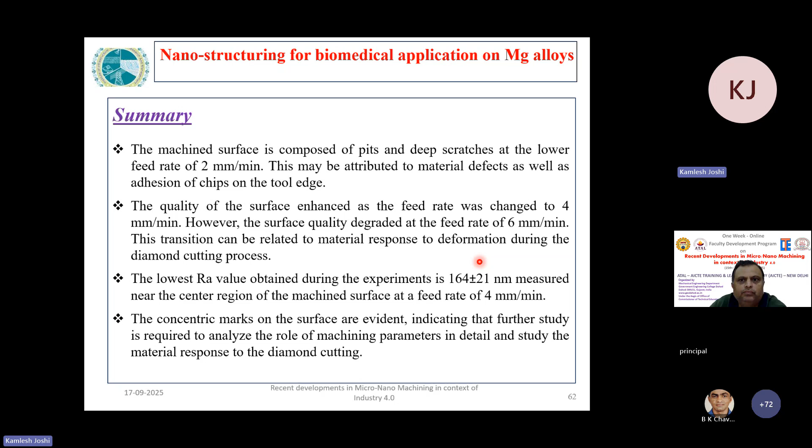This is the summary: the best roughness achieved in this work was around 164 nanometers at a feed rate of 4 mm per minute. The surfaces were produced in the form of micro lens, and a contact angle of around 100 degrees was obtained in the work.

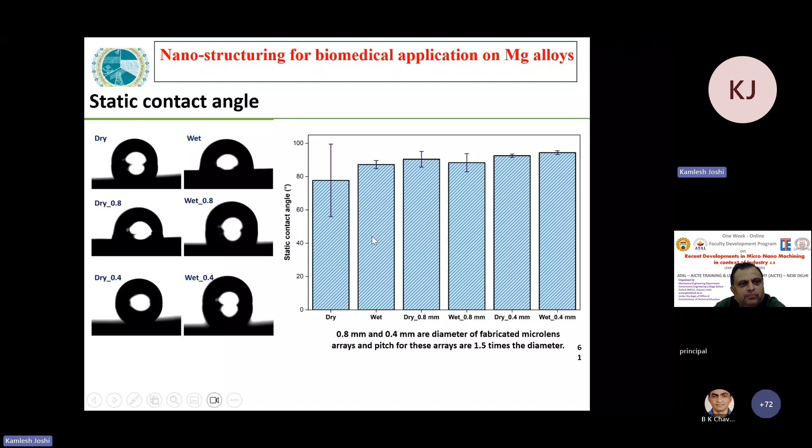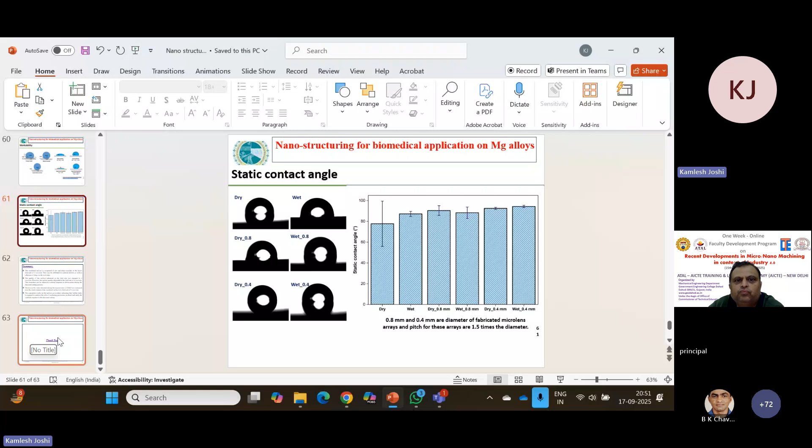A lot of results are there. I didn't want to bombard all of you with all of the results, so I have just presented some of the important results. The rest of the results will be published in the near future. With this, I stop my presentation, and if you have any question, you can ask.

Yes sir. In the chat box, Dr. Joshi... yes sir. Venkataraman sir has asked something in the chat box. He is asking: the plastic lenses are polycarbonate and PMMA, what else can be machined? You also can see it in the chat box. No, I'm trying to maximize it, let me see.

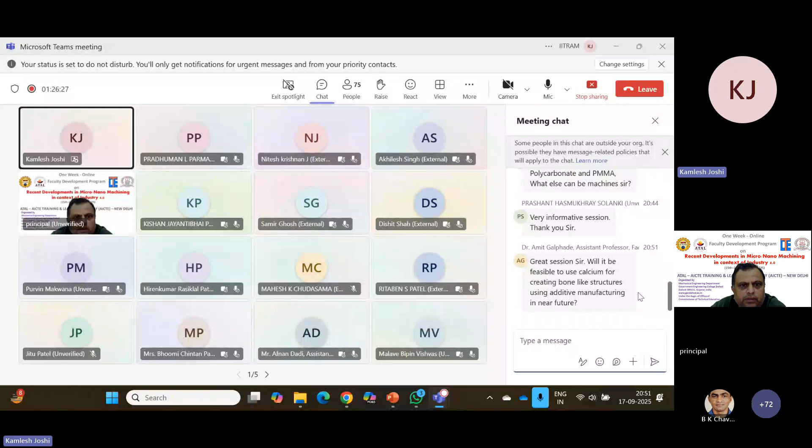Will it be feasible to use calcium for creating bone-like structures using additive manufacturing in the near future? Additive manufacturing has some limitations. One, we have to see properties like the burning effect, so calcium's melting point has to be seen. What people used to do is coat calcium coatings like hydroxyapatite coatings and calcium carbonate coatings using laser melting. That is one way of additive manufacturing, though not the standard additive manufacturing or 3D printing as per definition, but people have used those techniques. I am not sure about direct fabrication of bones using calcium, I have to explore this.

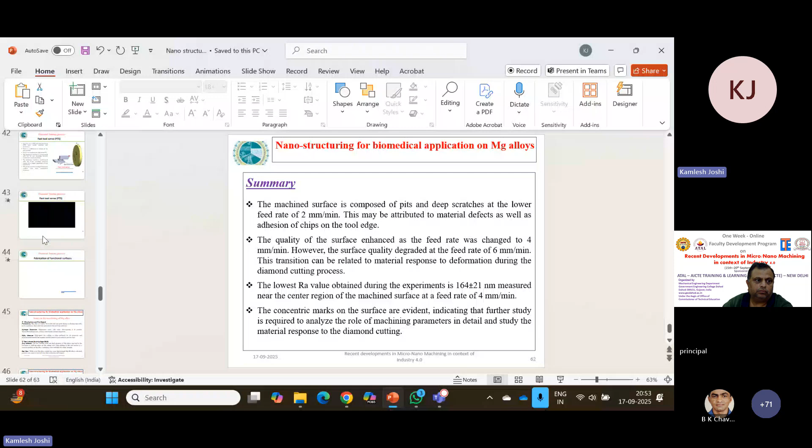Another question is, can diamond turning be used for surface texturing? Yes, diamond turning can be used for surface texturing, but we need more axis, as can be seen in the diagram. Let me again go to the picture of the machine, just 2 minutes. So here we can do texturing.

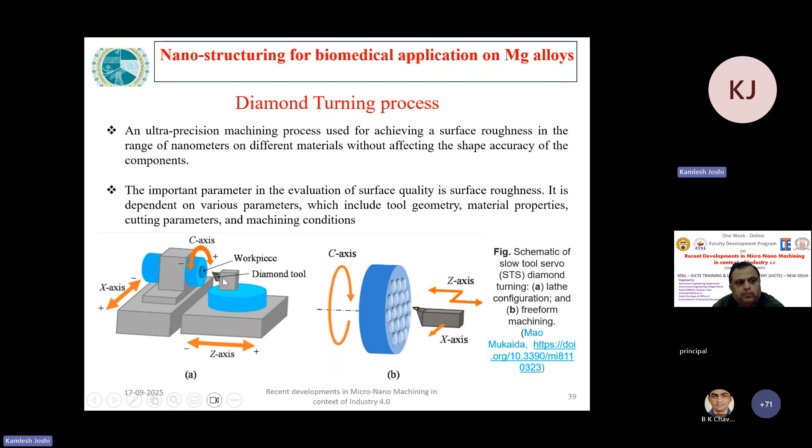You can move in the x-axis like this, but if you have the capability of moving in the y-axis, a lot of machines don't come with that capability. If you purchase machines with y-axis movement capability, the cost of the machine improves a lot, which goes out of budget. But if you have a machine with the capability of moving the workpiece table in the y-axis, and fast tool servo facility is there, different types of texturing shapes can be produced.

Okay sir, plastic lenses are polycarbonate and PMMA - what else can be machined? Apart from plastic, hard to machine materials like brittle materials can be machined. Silicon is one brittle material not easily machined using conventional process, but ductile mode machining of silicon has been possible using diamond turning machining. We can machine hard materials like titanium - people have explored those. Even softer materials like copper are very challenging to machine over this surface. Glass is another material which can be machined in ductile mode, being a brittle material.

Yes sir. Any more questions, or was my answer satisfactory? Is there any other question?